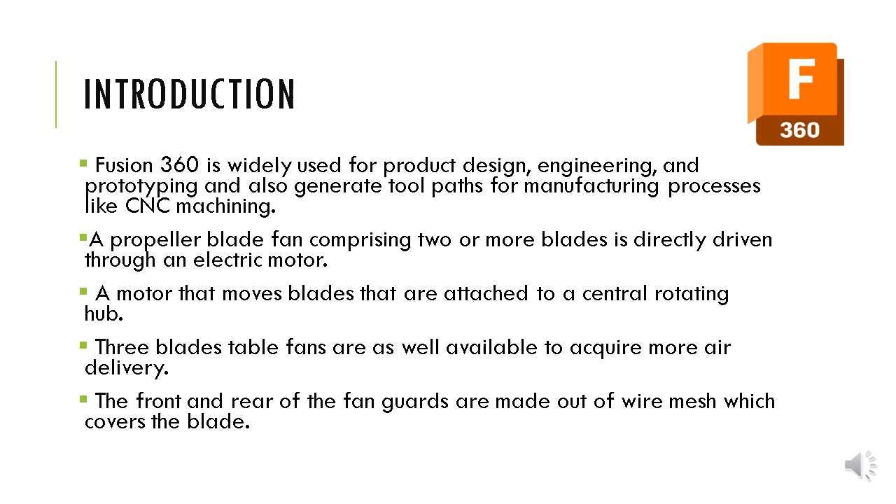For the group assignment, our product is a table fan that consists of 3 blades directly driven through an electric motor. The motor moves blades that are attached to a central rotating hub. Finally, the front and rear fan guards are made up of wire mesh which covers the blades from injuries.

For this assignment, our subject is a Panasonic table fan model AF30B, a 12 inch diameter table fan. The goal is to recreate this table fan in Autodesk Fusion as realistically and accurately as possible.

Here's the exploded view of the table fan, starting with the front grill, then the blade fastening nut that holds the fan blade, the rear grill nut that holds the rear grill, the main motor, and finally the fan stand.

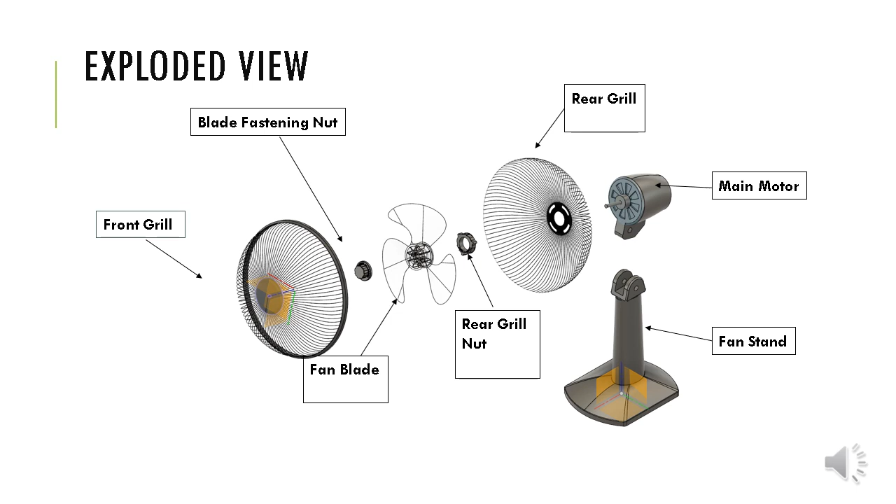The animation of the exploded view shows how the fan is being assembled in Autodesk Fusion.

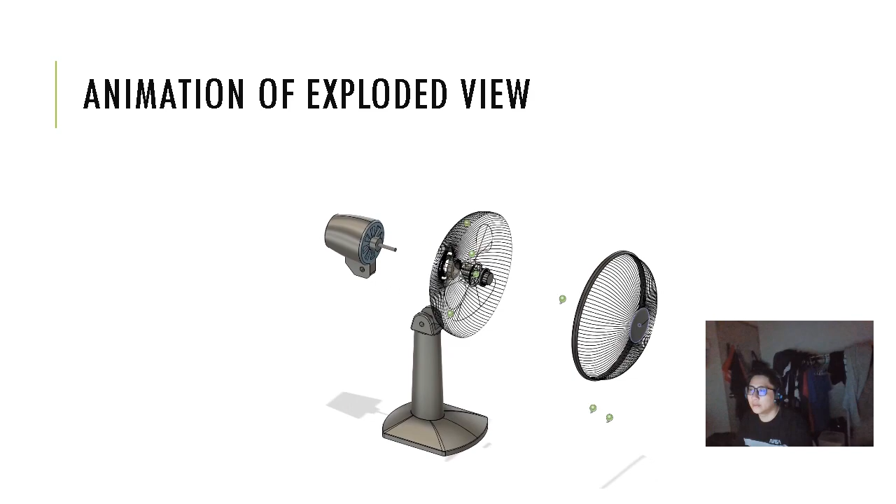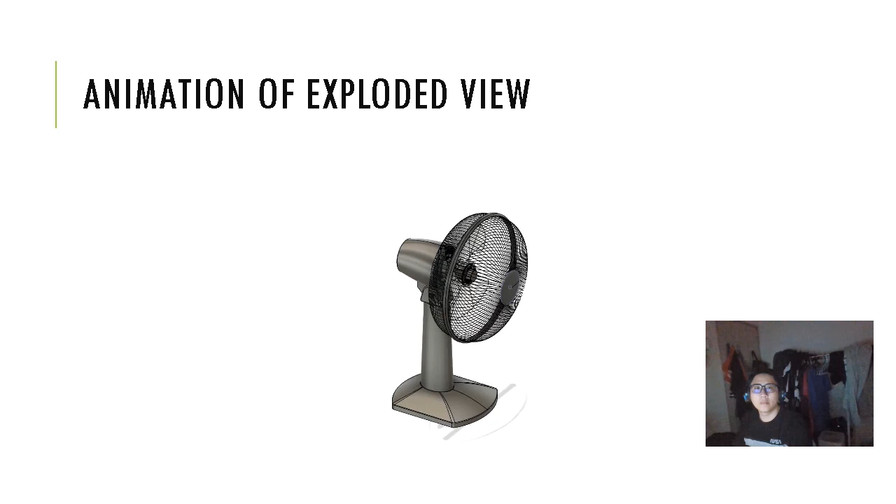Before starting to sketch in Autodesk Fusion 360, we need to take measurements of the real unit. Here's an example of the measurements of the rear grill nut.

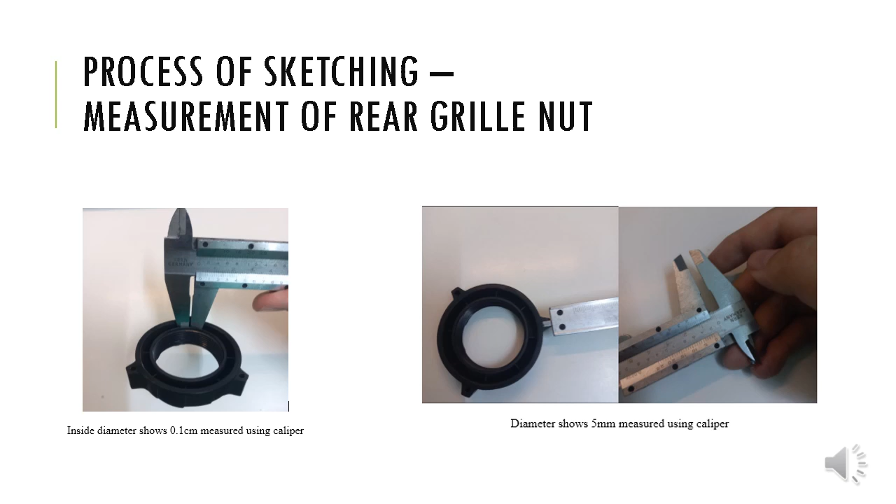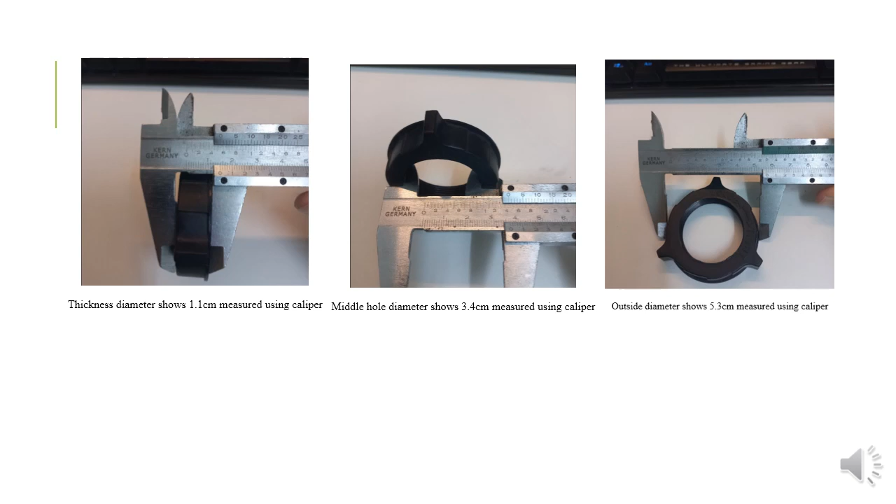In the next slide, my partner will show how he recreated and sketched the rear grill nut in Fusion 360. So let me briefly introduce how I drew this fan assembly.

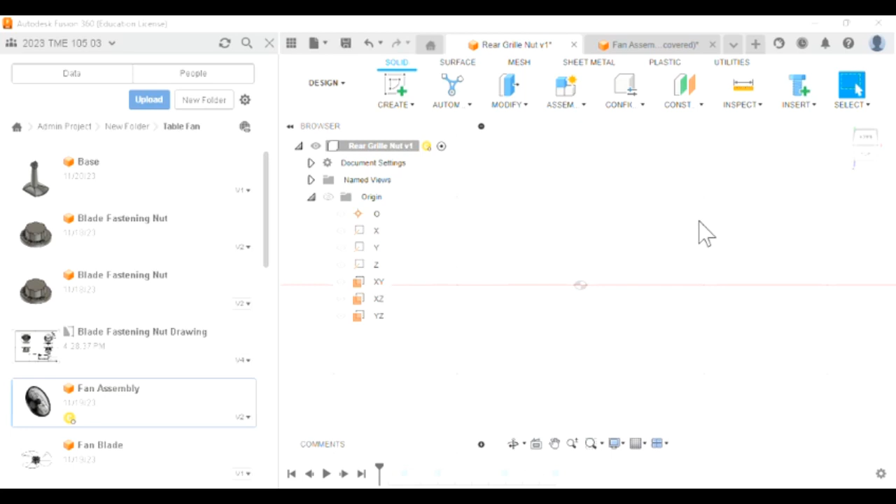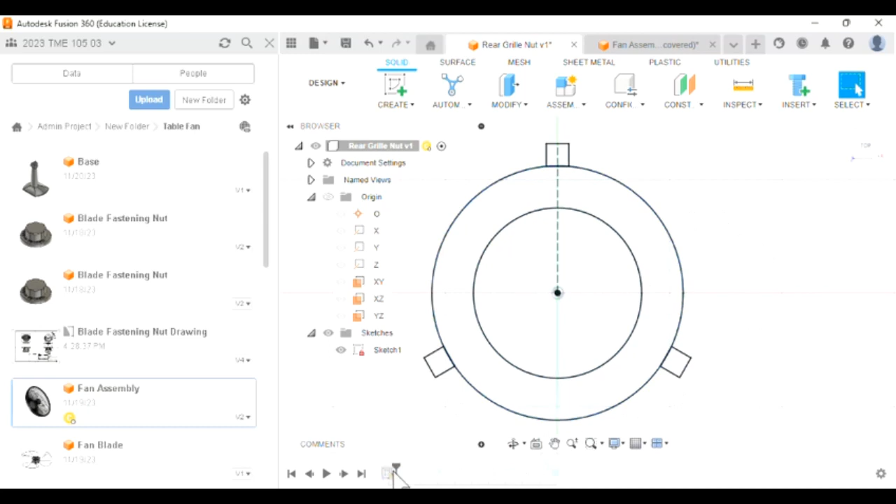Once we have taken the readings from the actual photos, we try our best to replicate it in the system. Usually my habit is to start from the top surface and sketch out the overall dimensions. There is dimension being defined here, as you can see: this is radius 18.75, and this is radius 18.75, diameter 37.5. All of these are predefined, and we'll extrude the overall shape.

Next, we try to draw the fillet. Due to a constraint in Autodesk Fusion, it's not able to do fillet in a single direction—if I use the fillet function here, I can only create fillet here, here, and here, not the other side. So I have to do it through sketching on top of the surface. Once extruded and merged again, it creates a nice fillet area here.

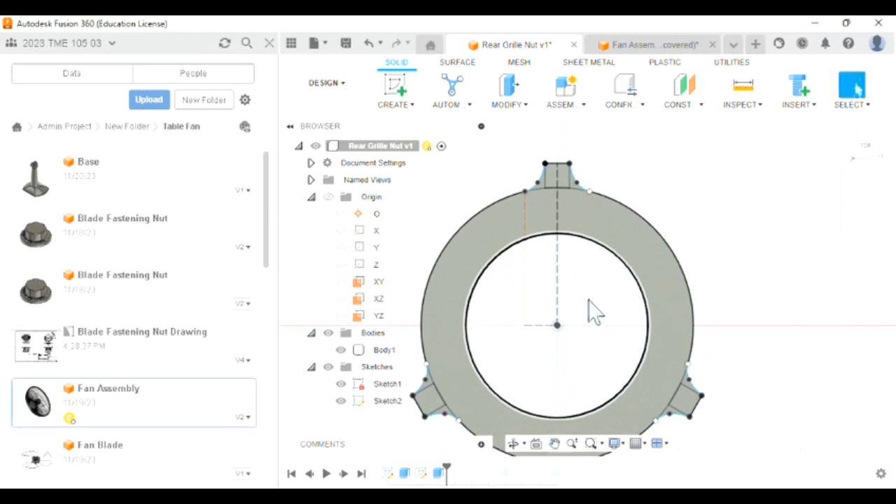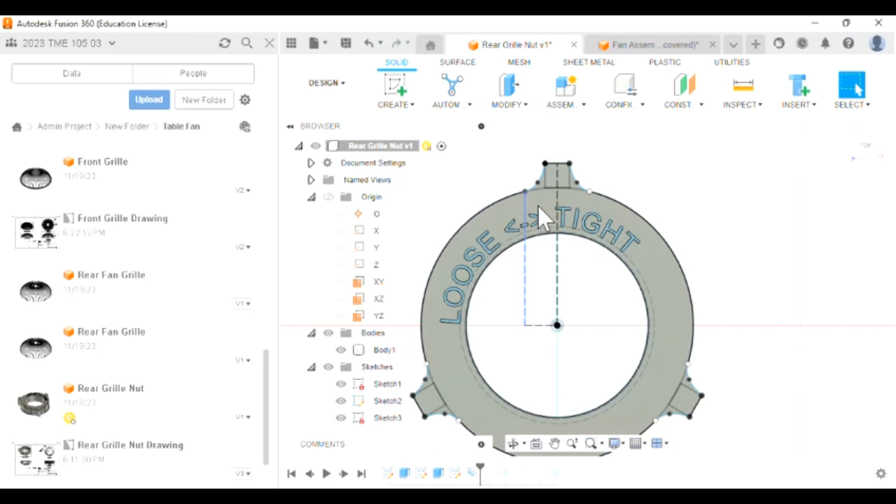I'll try to create the writings on the rear nut that indicate the direction of loose and tight, using the emboss function. This function can emboss the writings out—this is how the writings are created. This is just to make it better visibility.

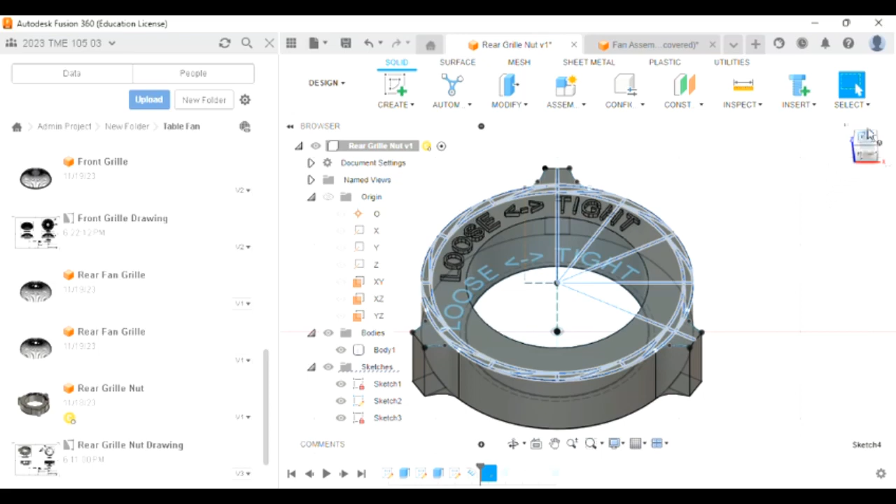Here I try to create the wedge gear shape, which is intentionally designed by the designer to increase the grip of the grille nut. To draw it, I use the circular pattern function here. Once I count how many gears are needed, I'm able to calculate and save a lot of time and effort drawing the gear. Once I draw the gear out, I can cut it just like this.

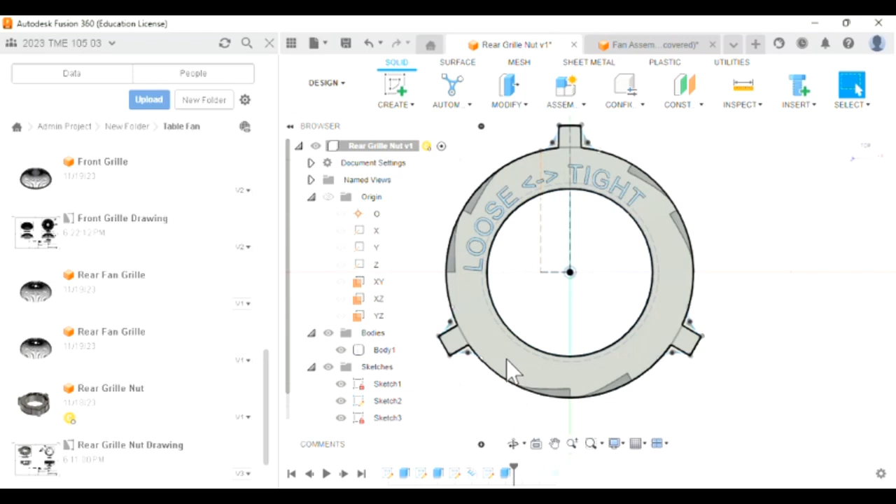I'm also making use of the tangent function. If we go into this sketch, you can see all of them are defined—defined through constraints like tangent or coincidence. All of these are being defined properly.

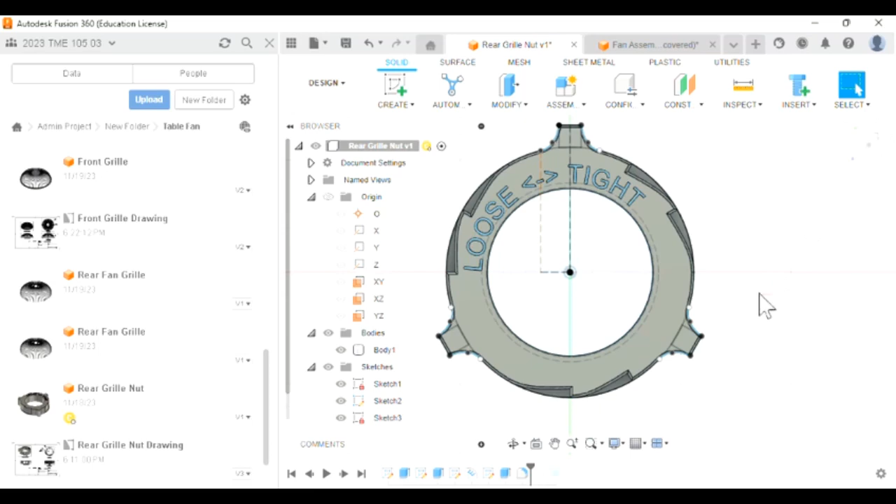Next, I try to round the edge here using a fillet function, so this edge is filleted properly, to try my best to replicate the original part as much as possible.

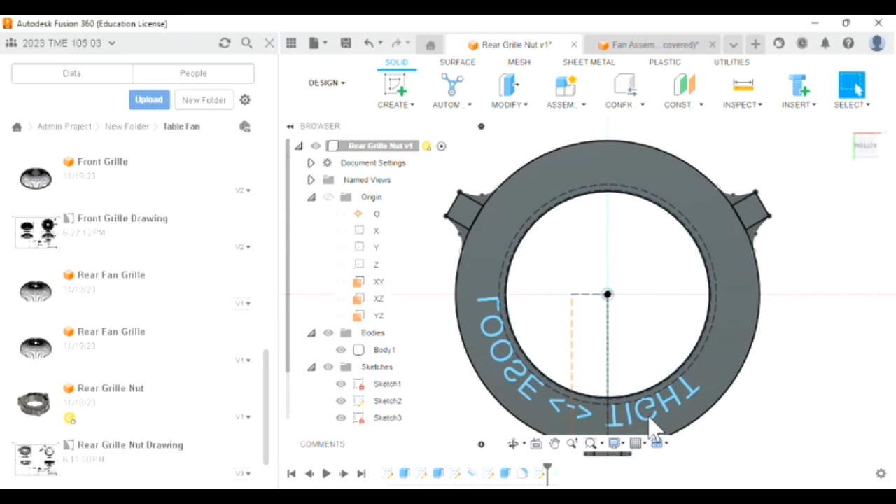Last but not least, at the back, I try to create a shell surface—that's how we do the details here. So this is how we actually sketch this in Autodesk Fusion 360.

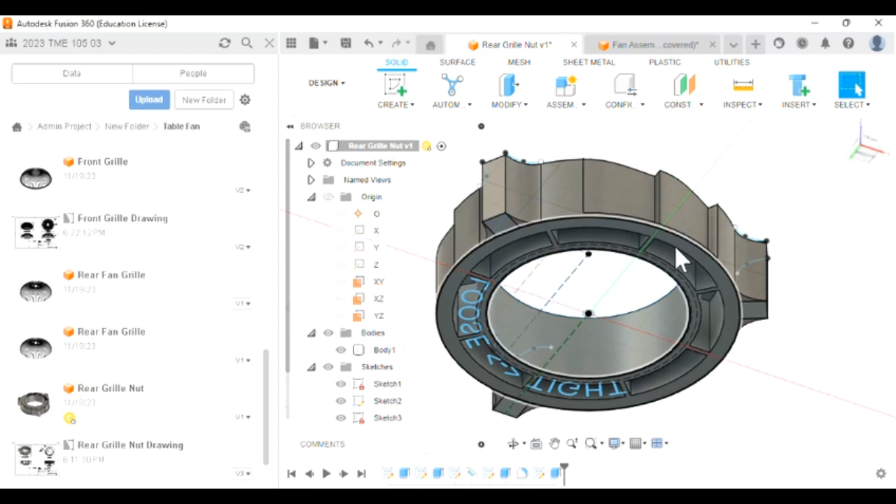Of course, for all of this I use a vernier caliper to measure and try my best to replicate it as realistically as possible. So this is just one of the components, and next, how do I actually assemble all of those parts that have been sketched together—that's in the assembly.

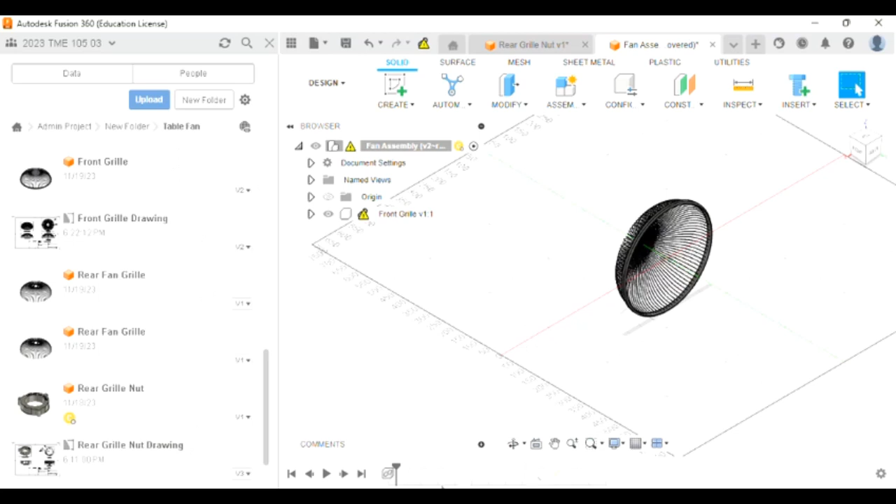This is how the part is being assembled together. You can see it's assembled one by one by dragging and dropping the unit from the taskbar, and defining them using assemble joint. Once you select any round surface, it can match conically at the center point—I do that like this, and all of the parts join together.

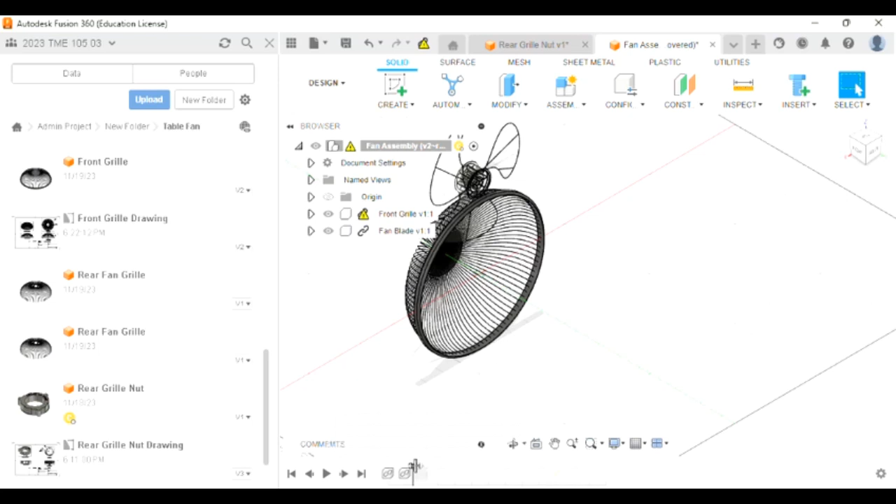So it comes together as a shape, piece by piece.

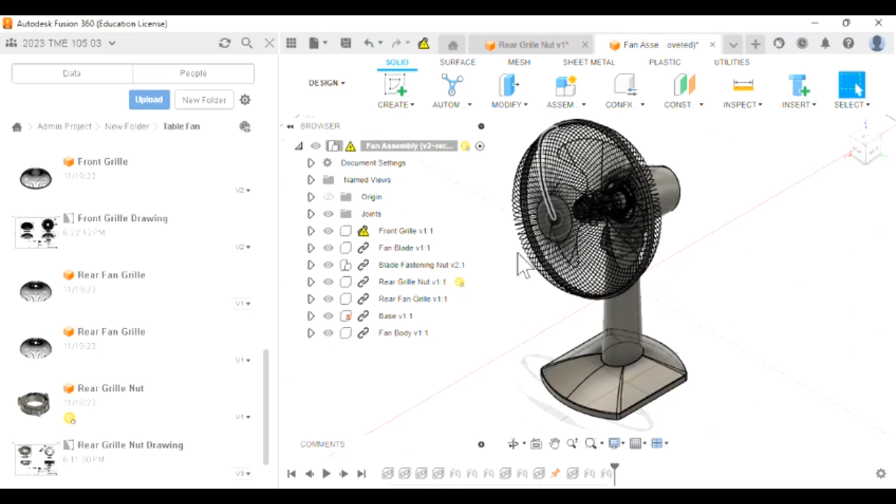So at the end, this is the actual fan. I can also change the display of the fan—this is a more realistic view without the edges, this is with hidden edges which is a semi-transparent view, and this is an opaque view with edges.

I can play around with the settings here—this is a dark sky setting, which makes it harder to view. I choose to go for photo booth, which is usually the easiest one.

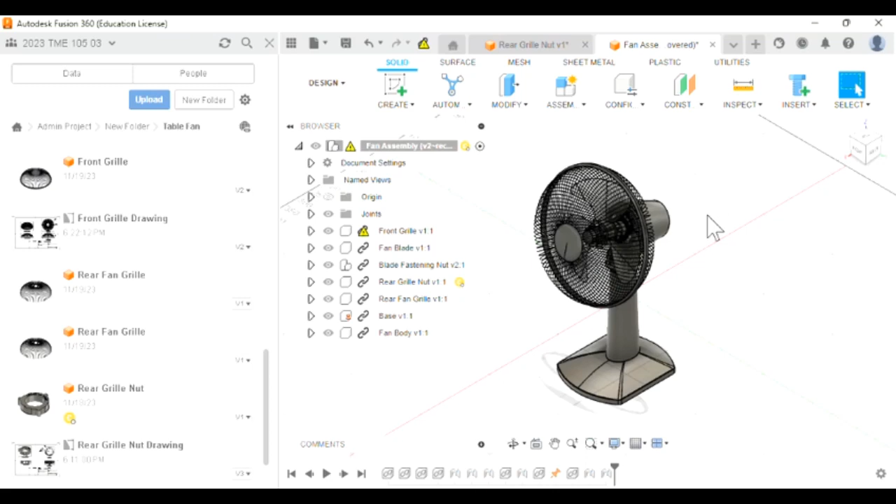Next, if I want to duplicate the simulation or animation, I go to the animation tab. I've already done this before, so I have a backup here, and I can play around the timeline.

Here, the Front Grille—how does it move? We can define it through transform and manual explode, but just for your information, you can see this.

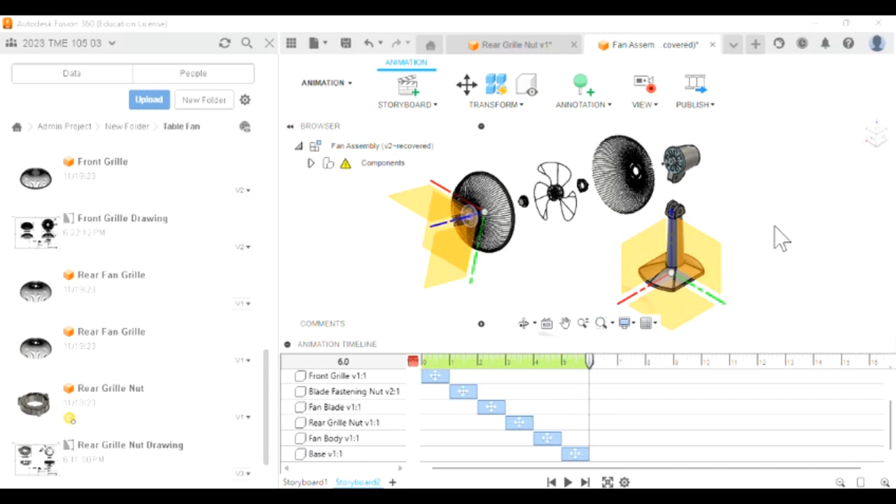So this is how I produced this project. Thank you very much.